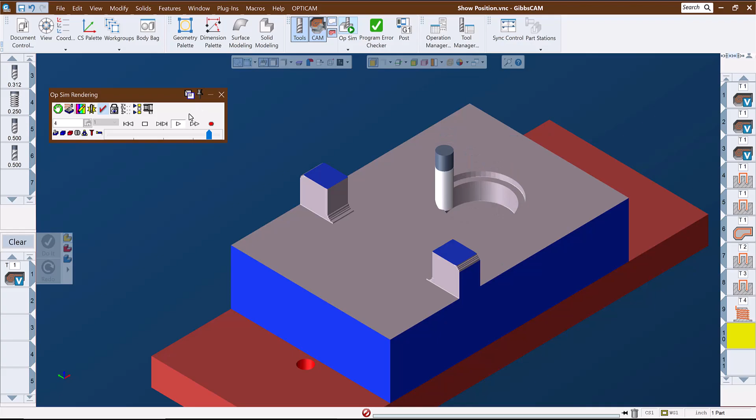This tool is a plugin called Show Position. It's located in the Plugins menu and is already available in a normal GibbsCAM installation. This is one of the tools that I like to keep handy, especially while I'm evaluating a model and planning my strategies and tooling choices.

Show Position has three static functions that you access by clicking this icon on the left end of the Show Position window, as well as a fourth function that activates only while a simulation is actively running. With the simulation running, the current position of the tool in the program relative to CS1 is actively displayed in the Show Position window. Let's take a look at those three static functions.

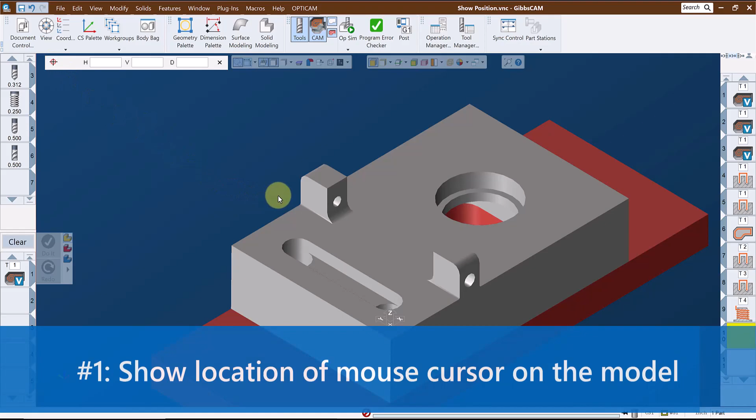The first function returns the location of the mouse cursor on the model. The horizontal, vertical, and depth values, which in the XY plane would be X, Y, and Z values, of the cursor on the model will populate this dialog when the mouse is clicked. These values can be reviewed or, if needed, copied and pasted into other dialogs.

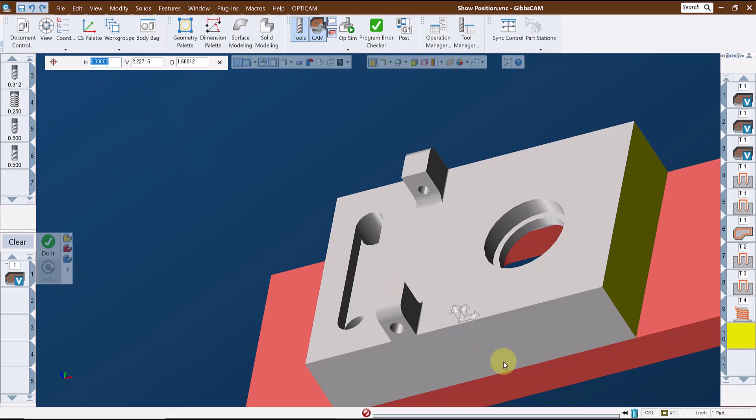This can also be very handy on the OpSim or MachineSim model, where we can even pull values in process. I could stop the simulation partway through and check the location of a particular face at a specific point in the toolpath. The second function in Show Position is thickness.

When I click on the model or the sim model, the software calculates a linear measurement from the point I click on, normal to the face, until it reaches another face, and returns the distance between the two faces, again measured perpendicular to the face.

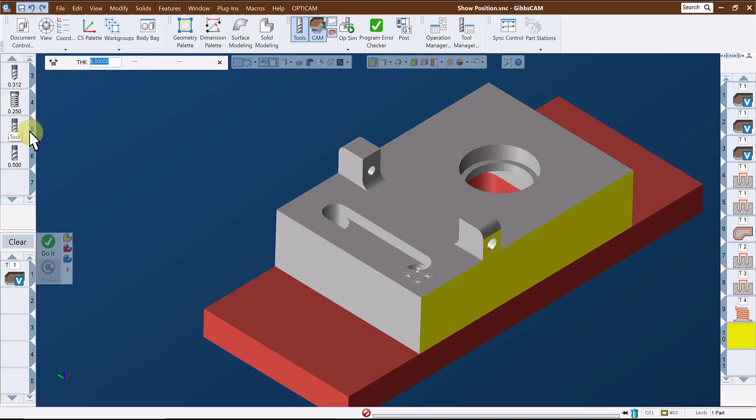This is a quick, easy way to check the thickness of a section of the model. I think it would be more common to use this on flat surfaces, since if you click on a hole, for instance, you are unlikely to hit the exact quadrant, and the measurement is always normal, or perpendicular, to the point on the surface where you click.

This function can also be useful with the rendered model if you need to check the position or thickness of features during or after the simulation.

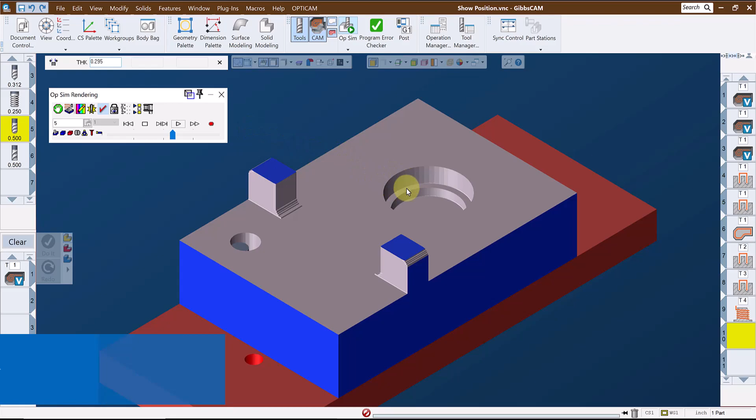The third function of Show Position is curvature. This is one of the tools available to analyze the size of a radius on a solid model. It's very handy to quickly check a fillet size, a radius size in a corner, or hole sizes.

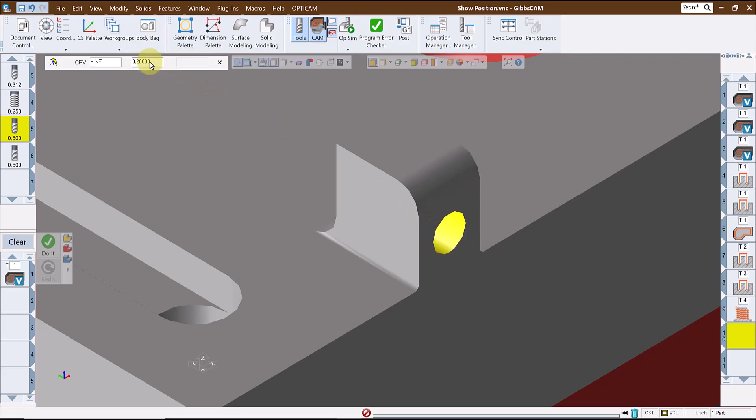Of course, the value returned is the radius of the face, so in the case of a hole, you would double that value to get the diameter.

Again, the values that are returned when you use Show Position can be copied and pasted to other windows if you wish. So, possibly in setting up my tooling, I know that the end mill I'm creating needs to be able to finish this fillet.

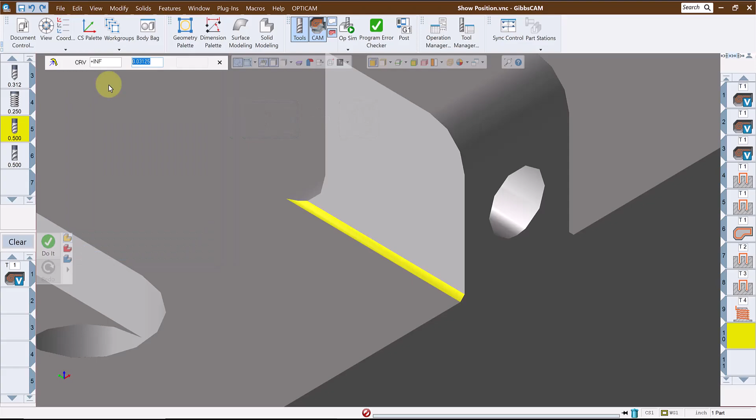If I wanted to, I could capture that radius, copy the value to the clipboard using Control-C or by going to the Edit menu and selecting Copy, and then paste that value into the corner radius field of the tool using Control-V or by going to the Edit menu and selecting Paste.

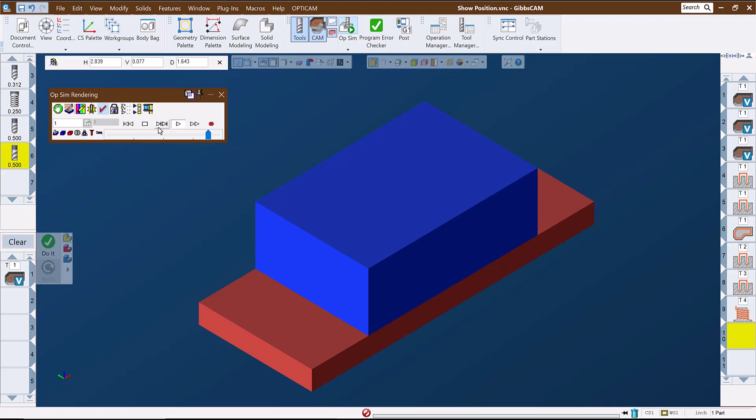In this video, we've looked at using the Show Position plugin as a tool that is helpful in checking various features of a model prior to creating toolpath, as well as checking values on the simulated part, either mid-simulation or after simulation completes, whether you create the toolpath based on a model or based on geometry.